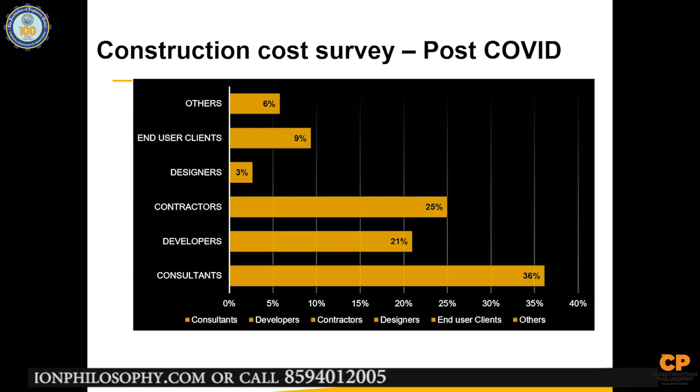This was done in the month of May, where we went out in the market to understand, because no one knew what is going to happen, whether prices are going up or down, whether labor is available or not. So when we did the survey, our focus was on what's happening with cost. The interesting read was about 53% of respondents were expecting steel price and cement price going up, compared to what we had in the market. That's a majority of people feeling prices will go up in the long to medium term. I'm not talking about short term. Short term, obviously, prices have gone through the roof, especially for cement and concrete RMC, because labor is less, there's no supply available at RMC plants, and you need to pay extra.

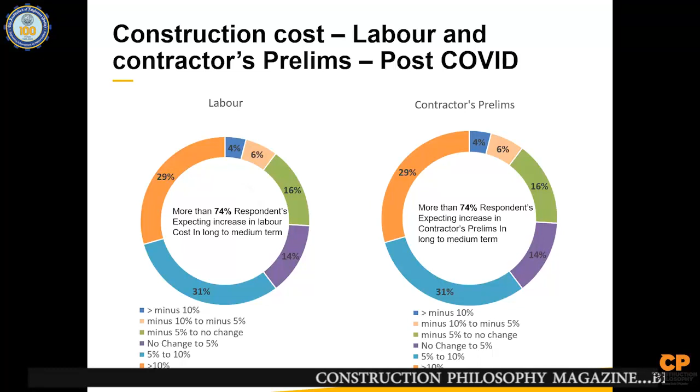But even after stabilization, they feel the pricing will have a little more effect. The major part where everyone was more concerned was labor and contractors' overhead or prelims costs. About 74% of people feel that labor cost and contractors' overhead is going to go up post-COVID, because you need to make sure labor camps are proper, better than what you used to provide. You need to ensure all medical histories are checked, you're doing all the sanitation measures, at least until everyone is COVID-free technically with vaccination. So until that time, all these preliminaries are going to go up. This will probably be maintained because you don't know when it's going to come up. So every contract now will ask for all this as a minimum compliance. And when you have it as a part of compliance, which was not there earlier, that means your price is going to go up.

So these are the places where we think prices will increase, and you will have an impact on the project price. Right, so I hope that was helpful.

Before we started, a little dry topic of procurement and procurement routes. Yeah, all right.

Procurement - why do we do procurement? We as a client or owner want our works to be done, and we want to make sure we provide the work in the right analytical manner to the contractors, and we have the best possible options. And when we make a decision, it cannot go wrong. It has to be proper. So there has to be a logical way of evaluating things. That is why you go with procurement.

So how do we get it done? The best way is to write the procurement strategy along with your project cost plan, at the stage of schematic. I wouldn't say at concept too much because you won't have complete information yet. You can start at concept, have the preliminary, but have a sign-off by the schematic stage. So you know exactly how things will pan out, what packages are required, and what time frame you need to refer back to. So that is something you need to look at when considering the procurement strategy.

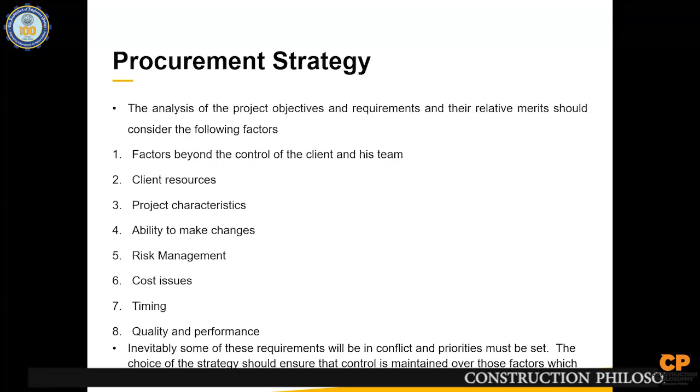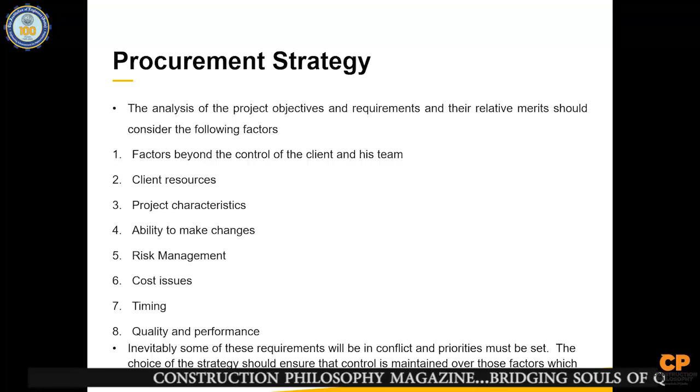So this procurement strategy you need to prepare. The procurement strategy should have all these factors: how is the client - national or local, does it have the ability to understand the type of project, does the client's team understand the complexity of the project they are entering into, what kind of project it is - a data center, a regular building, or a warehouse. Can we make changes in the program because there will be future requirement changes? How do we make sure that option is open? How do we manage our risk? How do we ensure the pricing we get is the best possible price? And how do we ensure we can manage the time? There are various aspects to this - you can have an early start contract, complete the design and then do the work, or you can wait for the client to ramp up his team. Depending on all these factors, you need to work on your procurement strategy, right?

The major part we typically see is time, cost, and quality - that's where it ends up. So based on this, and based on the risk attached to all these three factors, you have to decide, or assist your client to decide, the procurement route.

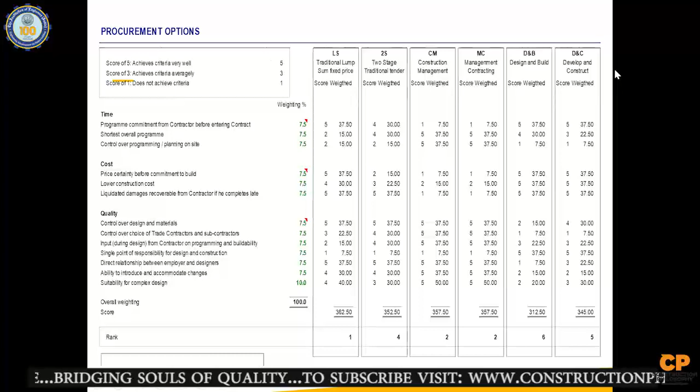One of the ways we look at this, and the way we do it, is a sort of rating system. I apologize that this is a little hard to read, I'll see if I can increase this.

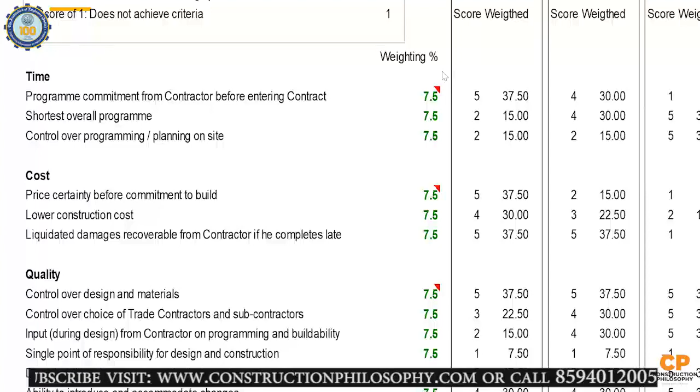What we've done here is broken it down and provided the weightage. Like a typical QS, I like to put weightages for my different factors - time, cost, and quality - and this gets discussed with the client. If the client has a higher requirement towards quality, I'll put a higher percentage towards that. If my client is more price sensitive, I'll weight the price more. Or if the project is more time sensitive, then I need to increase my weightage for time.

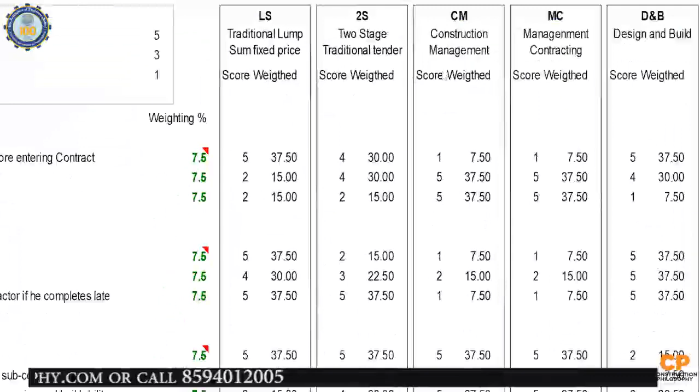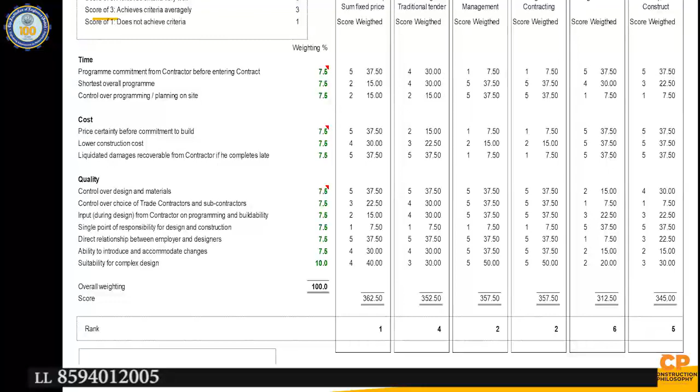Based on that, and based on each different type of procurement, which we'll touch on in the coming sessions, you can provide your own scoring, and based on that get to a judgmental call - a proper scientific way, but still a judgmental call - about what is the best possible option to go for. So this is something to look at when you consider procurement as an option.

So you derive a method which works for you and your company, and then come up with the solution that, okay, let's do it this way. So there are various procurement options available.

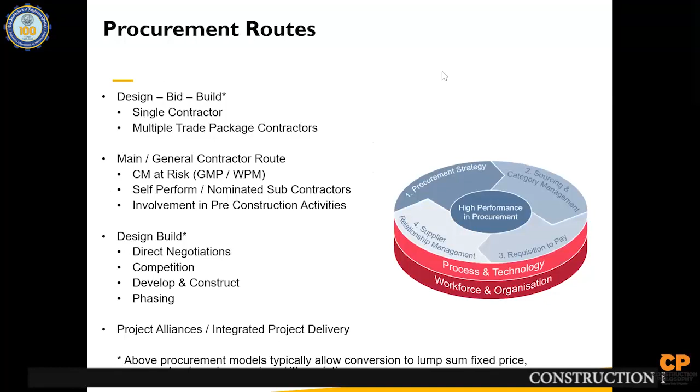The traditional and standard Indian way is design, bid, and build. You will have a full suite of consultants who do the design and provide the tender package and tender drawings, and the contractors will bid towards it and then build from that.

Then you have a main contractor, a general contractor, as another approach, where you have CM at risk - construction management at risk at a guaranteed maximum price or warranted maximum price - or you have self-perform or nominated contractors, or at times you want the contractor to participate in the pre-construction period as well.

You also have design and build options, where either the client provides a one-stage design and a design builder completes the design and constructs it, or someone just tells you, okay, I need a 300 bed hospital - please design it, this is my basic criteria, these are my basic specifications, you design it and provide it. So that's a sort of design and build, where everything is the responsibility of the contractor.

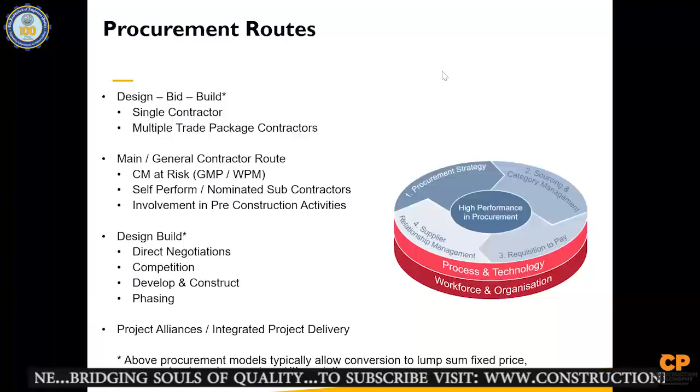You also have different other approaches like project alliances and integrated project delivery, which we discussed yesterday a bit. But again, these are the various routes available when you go out to market.

So it's not just labor, or material, or labor plus material - there are ways to look beyond that. You can divide it by how you want the price to return: item rate pricing for each item, or percentage based, where my estimate could be 15 crore or 20 crore and I'll take 3% or 4% on that. So based on the profit margins, you have a schedule of rates and work on a profit margin. Or you can have a labor contract based approach.

So per square feet, I'll give you $500 a square feet for labor contract, or $300, whatever. Or there's a lump sum contract, which is material plus labor plus plant and everything - a lump sum that will not go beyond that. Or it's based on square feet, where per square feet is my cost, and if the square feet changes, my price changes. You just need to make sure the methodology of measuring the square feet is agreed upon.

You also have sort of cost per key. So for cost per key or cost per bed, like say in hospitals or a hotel, or you can also agree a guaranteed maximum price.

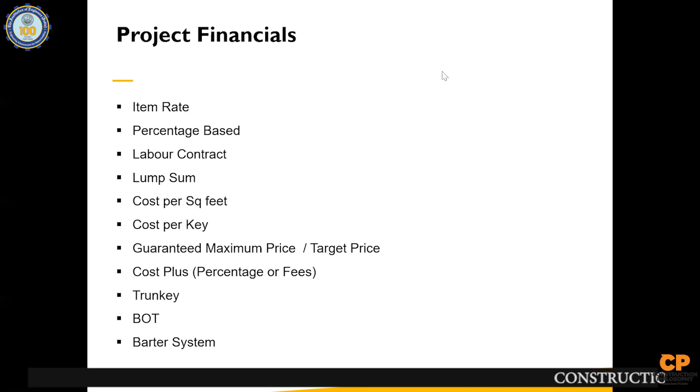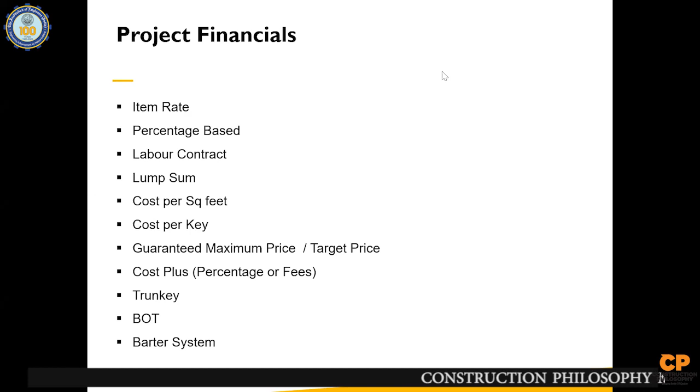A guaranteed maximum price or target price is based on, okay, this is the maximum I'm going to spend. I don't want to spend more than this. Beyond that, it will be your risk. So a contractor gives a guarantee that if your design doesn't change, your requirement doesn't change, they'll finish it within this price. If it does not happen, that's their risk.

There are contracts which are cost plus, so you can agree a fees plus cost, or you can agree a percentage margin. There's turnkey, there's build operate and transfer, or there's a barter as well. In Bombay and some places, the contractor will say, you give me 10 flats and I'll construct the building for you, and then they will sell it in the market as and when the time comes. So there are various ways of financial jugglery or typology you can play on.

So going a bit in detail on the advantages and disadvantages of design and build. You have the design build vendor who will control everyone, all other packages, all the trades. Some of them may do it in-house depending on their capability and understanding. So if it's a civil contractor, they might do civil on their own.

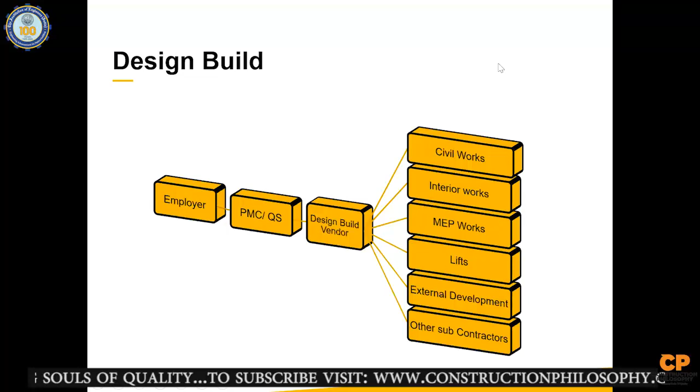If it is a data center project and MEP is their own, they will do MEP in-house. The rest everything they'll outsource. So depending on the type of project and the inherent capacity or capability of the contractor, they will decide that. The advantage is the whole design and construction is done by a single party.

So it's an advantage that you are not worried about the coordination, it is their job, they have to take care of that. Buildability-wise, the design and construction teams will talk to each other properly, so buildability and constructability are much easier to attain.

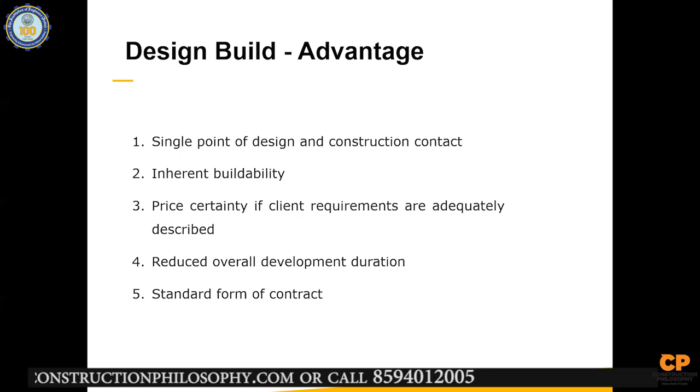The price certainty is pure because you can always describe this is the maximum I want to get paid, I want to pay, so it should not go beyond that, and design build can give you that confirmation. However, the only catch is your requirement should be clearly identified. If you don't, design build is the worst option you can have.

Design build has a standard form of contracts, like say the American Institute of Architects and all have standard forms which you can adopt, and you can reduce your time for the project. I don't need to wait for the whole design to get over, I can start my construction earlier because my design team will churn out the requirements faster to what I need.

The disadvantage is the client has to commit to the contract before design is completely done. That's one worry - what if the client does not like the end design, then what? The client will not have excessive design reviews or specification reviews because it becomes a little difficult since you're giving your requirement to the contractor, and that's very high level information.

It is not detailed out, like type of the makes, the smaller details, the sections - that is not agreed on. So that is all left to the design builders, and the design builder will obviously try to make the max out of that. So unless you are very clear in your initial design brief, it's very difficult.

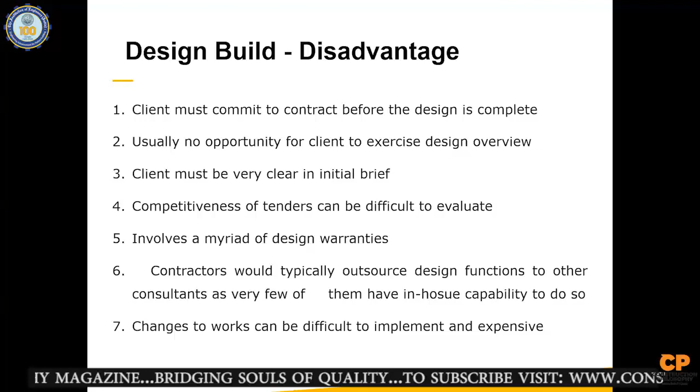There are different kinds of design build firms. There are contractors who will do the design and take design and build with small resources and outsource the remaining part, or there are other contractors who do it as well. Sometimes the design guys will do it and then outsource some part to a contractor.

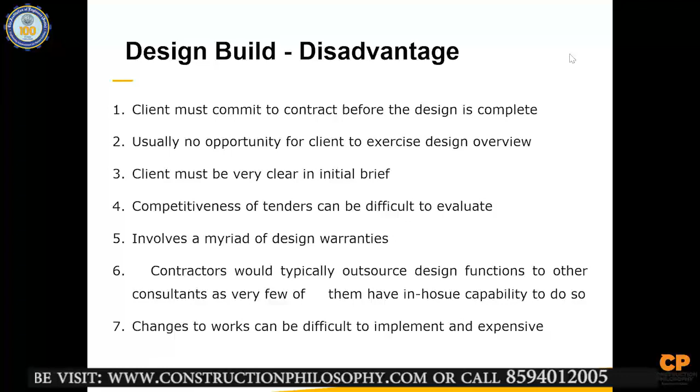In India, it's a little difficult and it is not fully evolved, but it is coming. Design and build is coming for sure for the larger projects and even the fit out projects. But we need to be aware that your design brief has to be 100% clear on what the client wants. If the client is not sure about this, pure design build is not the option to go for, because of how India thinks. If you go to the Western world, it's still easier because they have pretty much standard practices.

Okay, I need a school for 300 kids. It should be as per the standards given by Department of Education, and that's fine. But over here, things keep on changing.

One of the variations we adopted to take care of that is we have done the initial concept level designs, sort of layouts or agreement, so that the client is more or less okay on what the layout is, whether this layout works or not, and what their basic specifications are. So if you have early stage information, based on that, if I go with the remaining design and build, partial design build, it's still better rather than go with the completely designed build, because here my client is already aware about what kind of options I have.

They may have to give some money as a fee to the contractor or a new designer to give them the options, but that actually works out better because they have different options to look at and they can finalize. They don't need to wait for the whole procurement process to get over, and they can have it at the front end, right? So if you have a design build variation as a front end design with a schematic, that's actually better in India. That is what we have used.

This reduces the risk on the project. However, it takes a little bit more time.

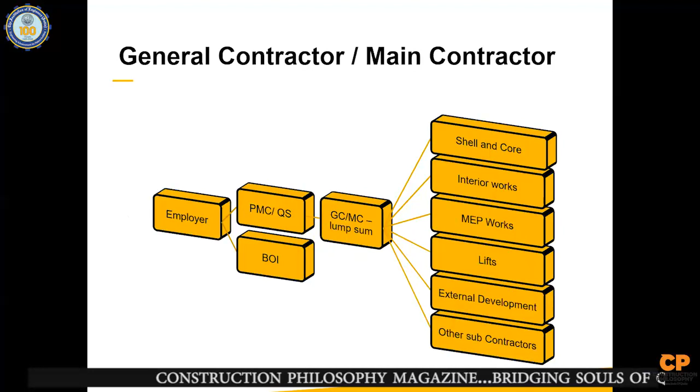So another way to look at it is we have a general contractor. In general contractor, what happens is you have consultants like PMC or QS, whether in-house or outsourced. Along with them, the client procures the main contractor. The main contractor probably would work, they might do some packages in-house like shell and core or interiors and all, but they will let out all other packages.

And whether they will agree as a lump sum depends on your design. If your designs are fully evolved, then you will have a lump sum price. But if your designs are not fully evolved, then you can keep it as a package price, and then you can discover the price along with them.

GC gives you competitive advantage at the front end. However, there are ways where you need to evaluate the GC, what packages they're doing in-house, what they are not doing in-house, and those kind of things.

You will not get your early stage design information. However, because your design team is completely detailing it out, you have more comfort level on the quality of that design which is coming through. The changes are easy to manage because with the GC and the packages, you know what tender set is and what the new drawings are, and based on that, you can easily evaluate the change and provide.

The risk of uncertainty is taken by the contractor, and the contractor takes care of most of the things after the GC has taken that price. And obviously, the contractor is liable for price or quantity variation if there is a change in the design from the client or the owner.

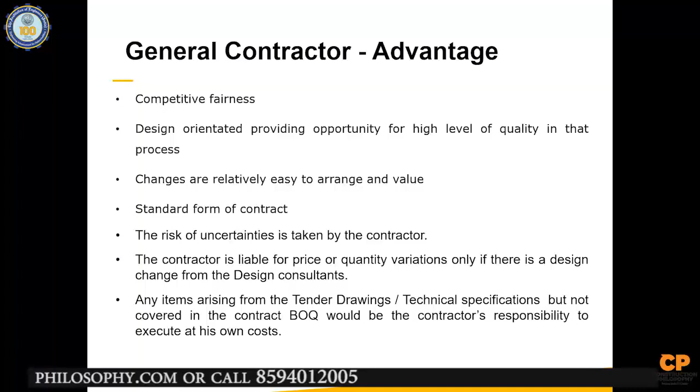So that is something to be looked at, but only when there is a change. One way what we do is when we go the GC route, we ask the contractor to review the BOQ, ask them to take care of that BOQ to ensure that they take complete responsibility towards it. So they take all the measurements, they review the measurements and confirm the quantities and the items so that there is no variation later on and they cannot claim for that.

Only unless you change your design. If the design is changed, then obviously the client will pay for that. So this helps in reduction of risk, as a mitigation measure.

Disadvantage in India, it's not very common, so there are fewer vendors who can go for this. The unknown site conditions, which is a worry for most places, means the contractor prices will be higher, and you will end up paying higher compared to a traditional method. So that's a disadvantage in terms of the price being higher.

If the main contractor defaults, that becomes a problem, because if you cannot go with the main contractor, that means you need to replace them. When you replace, that becomes a problem because you need to go with a new vendor and you need to do everything again. You have a performance contract, but they may not be sufficient enough, so that becomes a problem too.

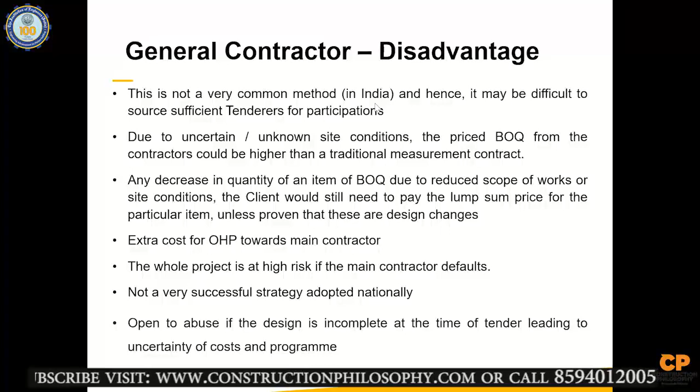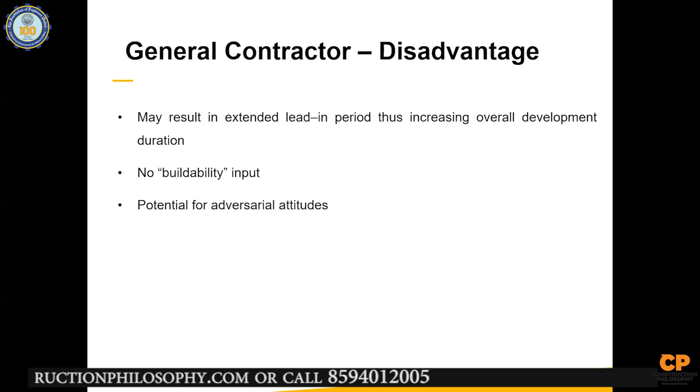With a general contractor, because your design is completely done, there's no buildability input, and GC always has a potential for adversarial attitude - people not working together as a team. They are still in a master and servant relationship, which is again not the ideal scenario in my opinion.

So with a general contractor you can try to offset some of the price or risk. You can provide basic rates to the contractors. If you're able to go with a lump sum, then you can have a schedule of values. So your BOQ goes out, and everything goes back to your overall bill of quantities - but you are basically talking about drawings and specifications. If you are going with the item rate contract, then you will need to have item rates. Otherwise, you can go with approximate quantification and ask the contractor to update the quantities or provide queries, and in case of any difference, that can be sorted out.

You will also need to decide if you are supplying anything directly and up to what level - what are the battery limits for that? So if you are supplying a chiller, are you also supplying the panel for the chiller? Are you taking care of its first maintenance, testing, commissioning? Are you taking care of temporary power for that, or is the contractor going to provide it? So you need to decide and agree on your battery limits, how much they are. That is something to be looked at.

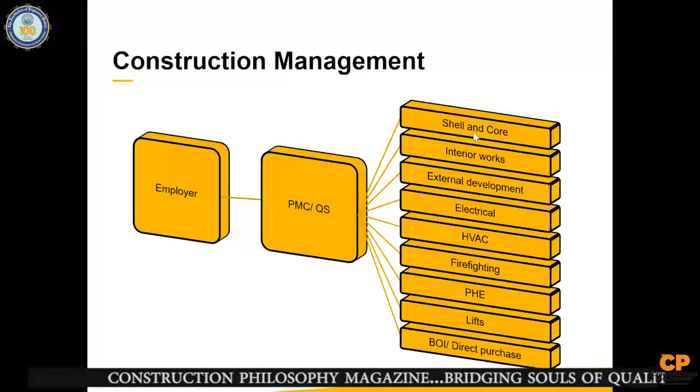One of the other aspects, and what people have typically done in India, is construction management. In construction management, all the packages are broken down into whatever we need, and depending on all specialists, then we go and buy. This is the standard method for most of the private projects, I would say. Within that, you have all the packages, and you have one or two agencies who will coordinate everything.

Construction management advantages: you can go with early packages - as long as your excavation package is ready and available, you can start that package. You can go a little faster. Everyone is clear about their roles and risk because it's all one-to-one contracts - there's no overlaps. Your changes can happen during a later stage as well.

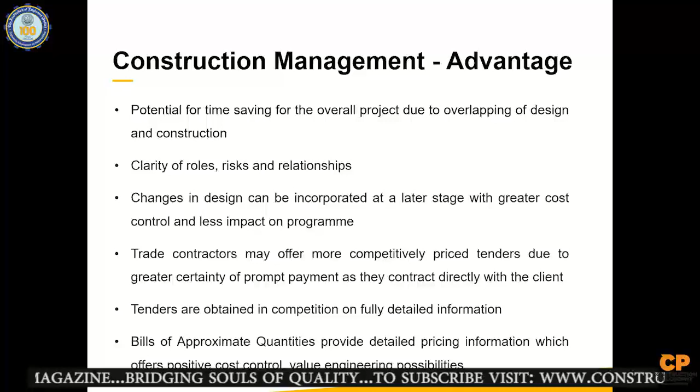Obviously there'll be value engineering and value management issues, but you can make changes if you want to. The trade package will have a more competitive price compared to the main contractor, because the main contractor will need to put pricing, risk, and overheads on top of that. You can have your tendering process in competition with fully detailed packages because you will have enough time for that, and you can go with better post-contract evaluations because your designs are completely detailed and your requirements are done. Only when you keep on changing your design will problems come.

For payments, either you can have a percentage based approach or based on remeasurements, since you have the bill of quantities available and there are multiple packages. The programs are clear - there's a clear understanding about the project program as long as the contractors are submitting it properly, and there's no risk. There are multiple players available, so if one person does not perform, you have other options within the site which you can put through - you have more availability, and your risk is reduced.

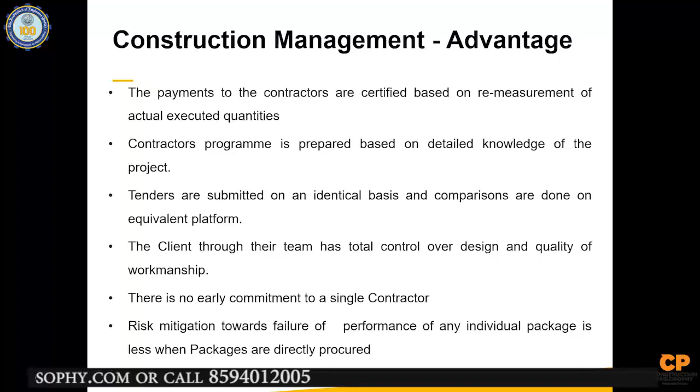In India, it's about pricing most of the time, so this is one of the most cost-effective ways to do this. With the advantage of supplying some of the items or having the basic rate, this goes well. So these are the major ones for construction management.

In terms of disadvantages, there's no single responsibility - there are multiple vendors and multiple players. There's always a fight on the site, like this guy has not given me the space.

My coordination is in trouble, my site logistics is in trouble because of this and that - there's always a need to be evaluated and discussed. So that is one of the issues. The client needs to take a completely owner-driven call because they need to be completely involved.

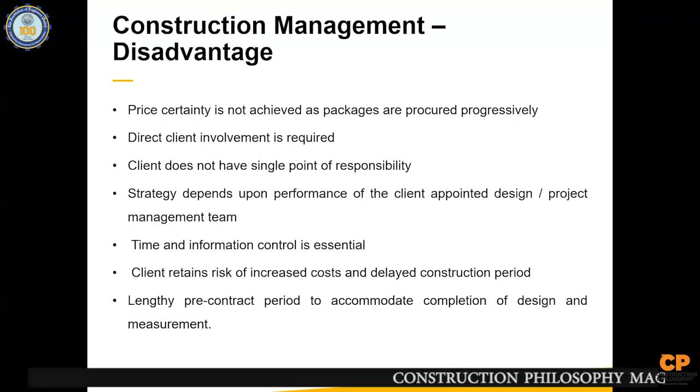My price certainty for the end project will not come. It will come only towards the end when I'm closing the final accounts, because there are so many packages, and every time either there's a change in design or a change in approach, my price would change. So based on that, there's de-scoping and all, and I need to know what is my real pricing - I could have overall control, but it's not completely nailed down.

Then it will require a little more pre-contract time. So there will still be parallel working, but there will still be additional time required. It will be parallel work, where the design keeps going along with your construction period, which is not ideal. Ideally, we should prefer that the construction period and design period are both adequate.

When you're shortcutting the design period, you're not evaluating all the risk, and you're not giving enough time for value management and optimizing - you're just going for detailed design. So detailed design will come out with changes. So it's better to go with a longer pre-con period compared to a standard Indian one, which is very short.

So these are some of the points - advantages, disadvantages for construction management. There are other ways you can look at as options, which is the nominated contractor.

So if you like some contractor who's a civil contractor and he's doing only civil, and you want him to take complete responsibility for coordination and all, what you can do is work with a nominated contractor as a thought process. You nominate him and he works out his pricing based on either fee or percentage, and you devise and agree an overall responsibility matrix - what he's going to do and not.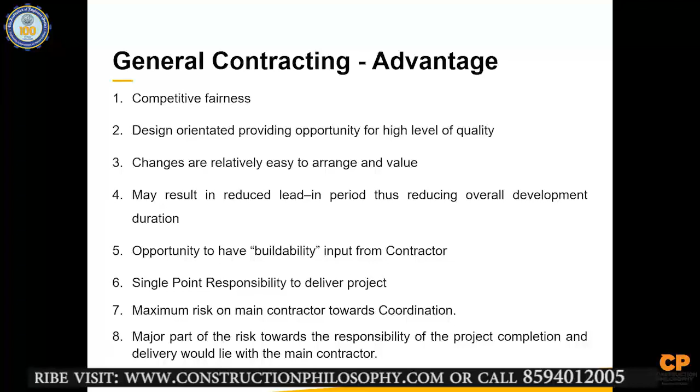The only issue I typically see in this kind of arrangement is making sure how the vendors who are getting procured actually get procured. Are they procured along with the contractor or not? If you're getting them procured along with him, that's better, because he can bring in contractors whom he's comfortable with.

So responsibility is actually passed back. If you're doing procurement on your own, and just giving it to him, then his responsibility is only towards coordination - performance and quality are not part of his scope. So that's something you need to work out, whether you want that or want it separately.

There are variations within the process where you can play and work on what responsibility you want to give the nominated contractor or subcontractor. The advantage is you still have single point responsibility, you still have the GC giving you more buildability inputs, and you have more control.

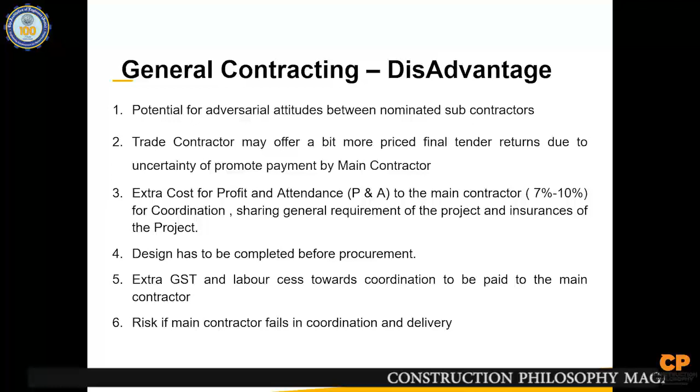However, your pricing will have an extra cost - you need to pay extra for profit and overhead to the main contractor, and design has to be completed. You'll have to pay more to the trade package, because the main contractor may not pay them on time. So that's something you need to work out - that the GC has to pay subcontractors on time, whether nominated or not.

So that's another issue we see in India - prices go up because payment cycles are bad.

This is another method we're currently using in some of our projects, called guaranteed maximum price. So I have a GC contract - I agree his overheads, I agree his percentage margins, and I agree his overall program. Then he goes out into the market and procures everything. So he'll procure all the packages for me one by one, and it will be jointly procured.

And based on that, I will agree his percentage margin. However, he has given me an overall pricing already, that, for example, if it's a Resi project, I'm going to do the project at price 2600. If it goes beyond 2600, then it's part of my risk.

So that's one way to control your price and take contractor's advantage as a GMP, and you still have a completely open marketplace. So each package you go out for tender, 3 packages, 4 packages, the GC will arrange that. You can add up your names as jointly agreed, and then you can go out to market, get the price and get it done. Right? So this is one of the nicer ways of doing it, which has come up.

This is what the US used to do. The US has it as a guaranteed maximum price, but they don't have the joint procurement. They just submit the pricing. But in India, people are more cost sensitive, so they want to be involved more and more.

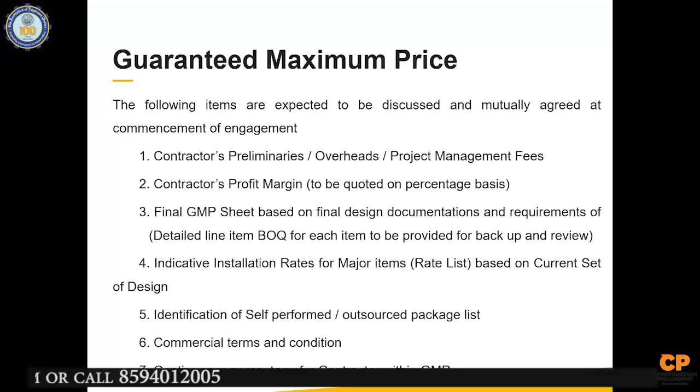Terms, conditions, payment cycle is something to be agreed with them. And because it's a bit more risky, I typically, and my clients are typically, allowed within the contingency about 3% or 5% of the value, which works as a buffer. So in case they missed out something or the project price has gone up in one of the packages, they can take it from the contingency, right?

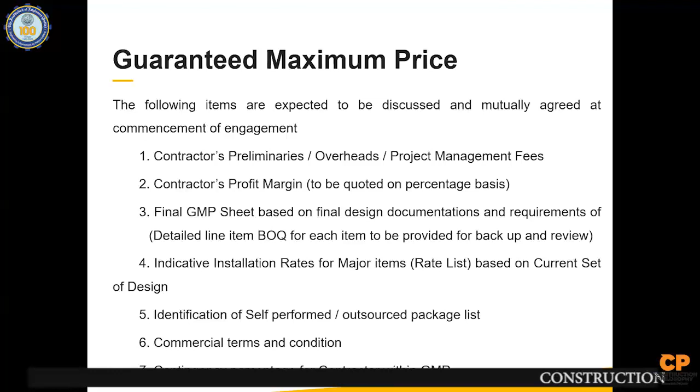And that contingency is actually better because we still have visibility towards it. We'll definitely have the visibility towards it, but that will make sure the contractor says, okay fine, I have this extra advantage of 3%, but I'll make sure the project is done within this 2600. Yeah, so this is something as a guaranteed maximum price can be worked out.

You have a single point contractor's contract. You have price certainty. You know what is your overall maximum price. Until you change something, nothing else will go up. So all this is part of the GMP what you can use.

The disadvantages, again, your design has to be correct, and you need to have your detailed design available. It's difficult to break down the competitive pricing, right? So there are formats to be done in a way, it could be customized to the requirement, but it can be done.

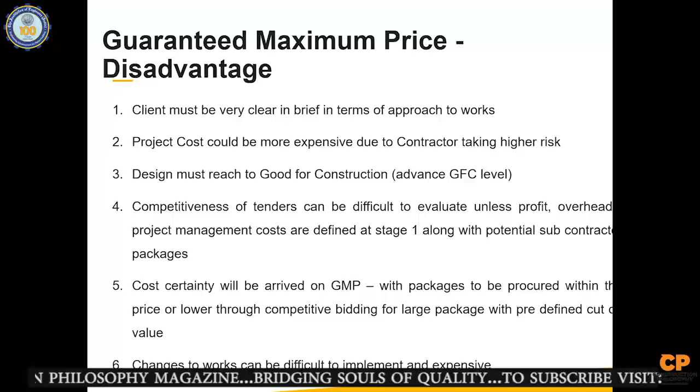And the certainty will arrive only when you have the buyouts. When you buy out all the packages, then only you will realize what is the real value, how much savings or increase it could be. Increase, you have kept it to 3% or 5%, but whether even that is possible or can we save somewhere, that can be done only when all the procurement packages are done, right? So these are the advantages and disadvantages of GMP.

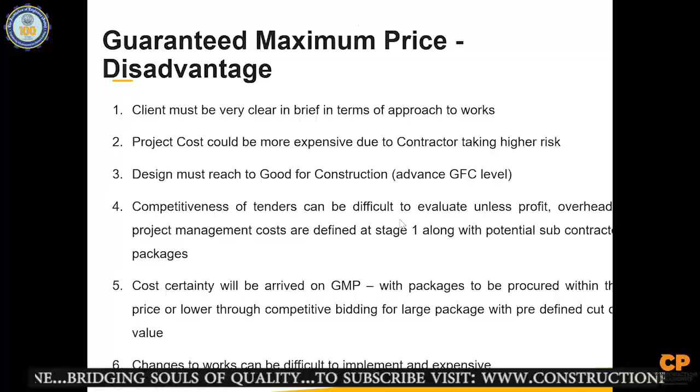There are a couple of other procurement routes, one is alliance contract. There are a couple of projects, I think even Kochi, where you had alliance contract. So in alliance contract, the whole project team, including the consultant, including the contractor, would work as a single team, that this is my maximum price, and if they save money from that, then they would share that reward. But if it goes beyond, there'll be a negative as well, right?

So this is a method which Tata Realty had used on Trillium, the residential tower in Kochi. So they had used it over there with Leighton as the contractor. So that is the alliance model what you can use, which is a multi-party contract. Everyone basically works as a single entity, single project, right?

And there's integrated project delivery as a partnering. So again, there are ways. As I said, the Alliance board takes care of it and all, it's directly on an open book format. So whatever goes on open book, plus all the add-ons on top of that as a percentage or fees, whatever is agreed. So that is alliance contract, which you can use.

Partnering is a little different way, where you talk about a management approach, which emphasizes a collaborative relationship rather than a short-term issue.

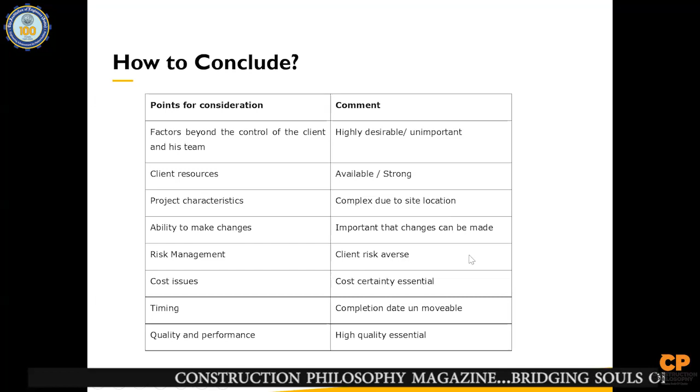You need to write down what the issues are, and what the major driving points are - whether factors are beyond control of client, or the client resources are good and strong, what kind of project it is, ability to make change, risk management, cost issues, timing, or quality. Based on all that you derive your own method. So what I shared earlier about the metrics on how you select the procurement route, you can conclude based on that.

So you go through all the options, understand what is required, and then you do it.

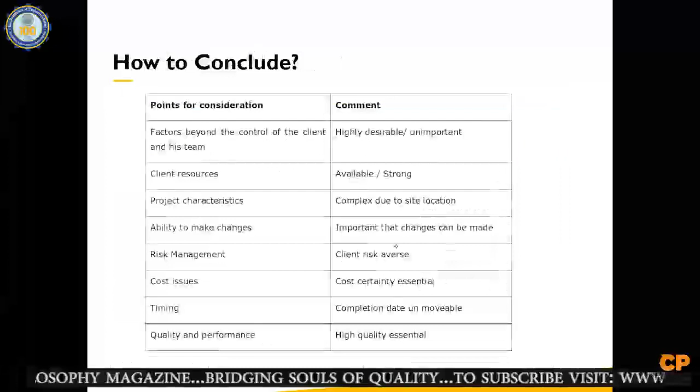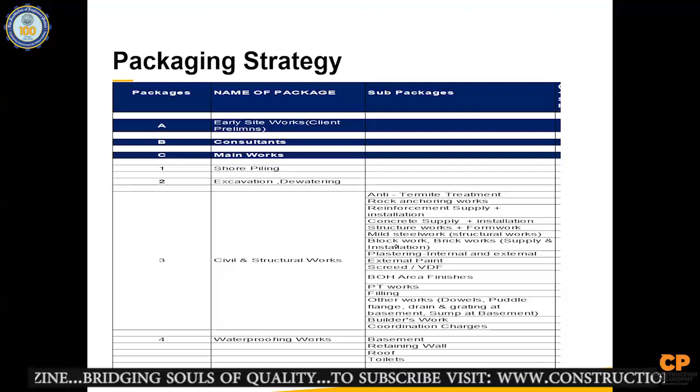Once you decide how you move and what kind of project procurement route you're taking, the next strategy you need to decide is how you're doing the packaging - what packaging and what item goes where. Let me give you a little - sorry about the image, but this is the best I could do here.

So for example, who's going to do what - whether shore piling is a separate package, excavation is a separate package or part of one and two together, civil works, what all would be required within that, whether waterproofing is a separate package or part of the main contract.

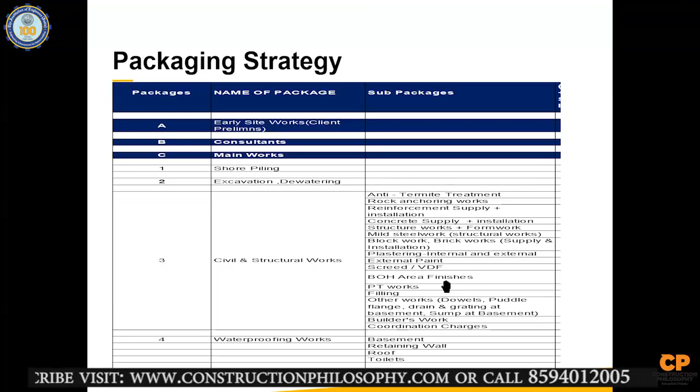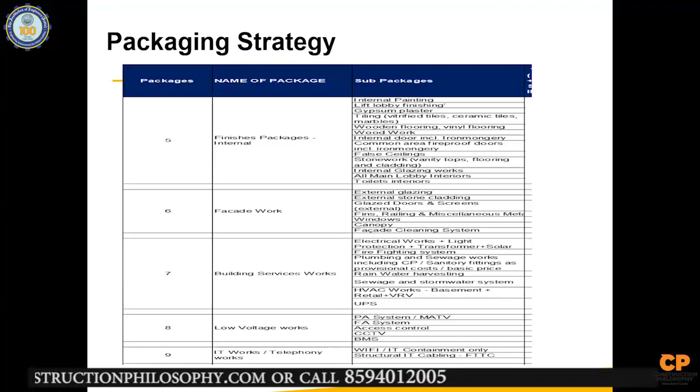So in this case, we had all these packages as part of a main package contractor, which was supposed to be done. Then you break down all finishing, all facade, whether it will be done as part of the main package or separate. So you write down all these packages, what is required for the project, along with your schematic cost plan, so you know exactly how the project is to be priced.

At times, what I've seen is even experienced QSs price it as per a standard trade package, but they don't realize this is a GC model, or the client is expecting a different way of procurement. They come in less than what the contractor will quote, and then there's a huge gap, right?

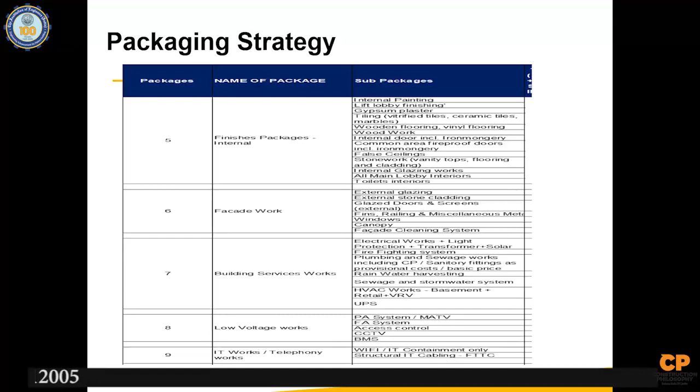And that becomes a problem. So that is something to look at when you are doing this packaging strategy. You decide your packaging strategy, how you're going to do it, how the coordination needs to be worked out, and then you decide all these packages as well.

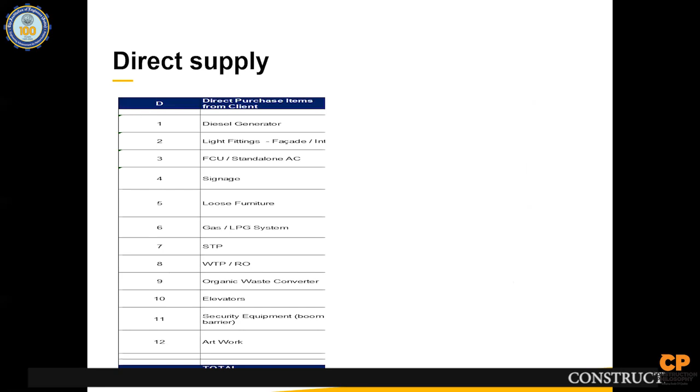As part of that, you also decide what are your direct supplies - what you're going to be providing directly to the client. So a DG, or chiller plants, or STP, or whatever - whether you're tying it separately or tying it within one of these packages.

So once you have this clarity, your procurement schedule becomes much faster. You know exactly what you're buying and how you're buying, right?

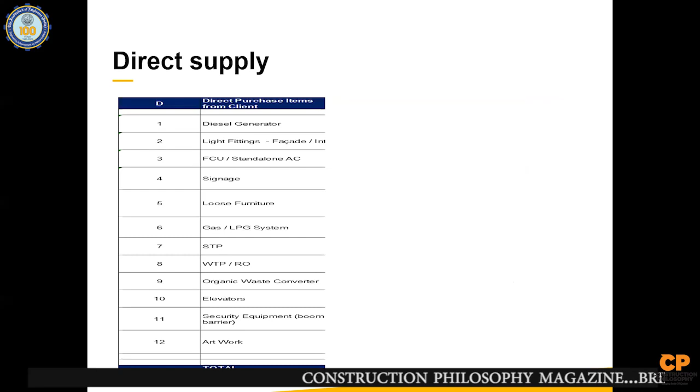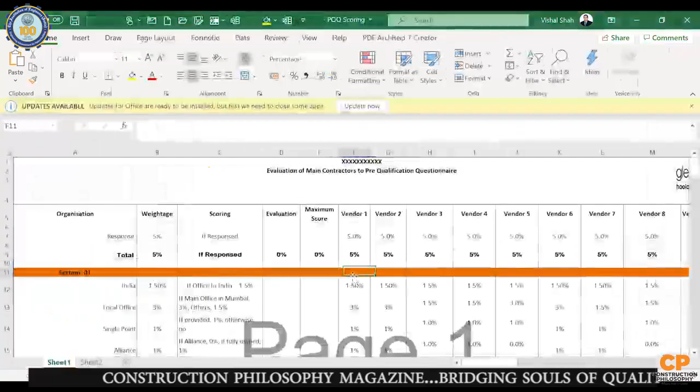Coming to - once you decide on your packages, the next thing is how do you go with the contractor, how do you get the contractors on board? So let me just share with you another file. So what we do is - I'm sure all the companies would have done this - for all the packages, how do they sort of do the pre-qualification.

So we also do our own way, and depending on the project, we customize. Depending on where the company is located, how long it has been in function, whether it has a number of employees we require for the project or not - based on that we derive the percentages.

Then we also put what is the financial status, what is order book values, what is the turnover percentage, whether they are making money, for example. If they're not making money, it's going to be a bad sign.

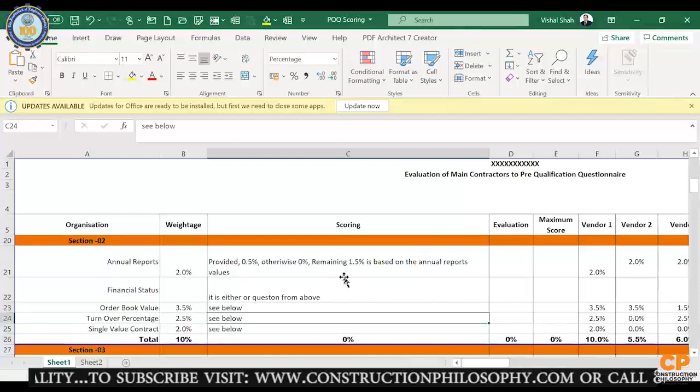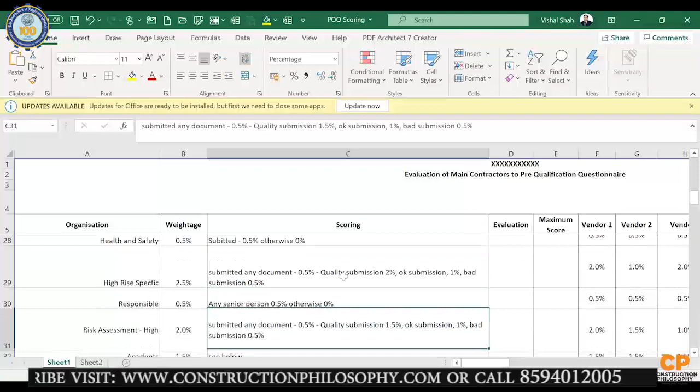So looking at all that aspect, we also look at the specific experience they have - have they done a high rise project or not, have they submitted the subcontractor, how they're going to do that, and how they're submitting the quality policy, safety policy, do they have all the standards available, do they know what to do, right?

And then we go specifically into the type of projects they've done, whether globally or locally, what they've done in the past. So based on my project of that particular type, we obviously break it down - per project we give, per year we give.

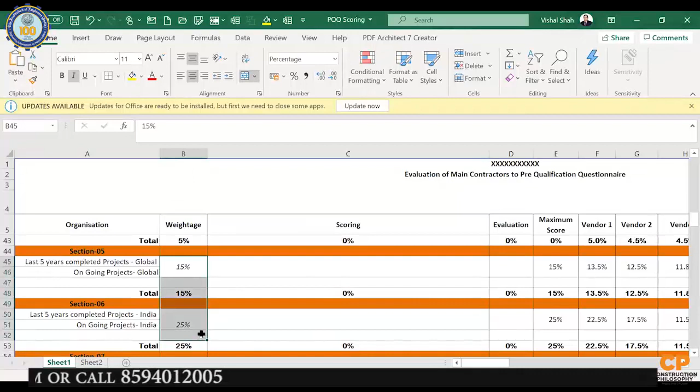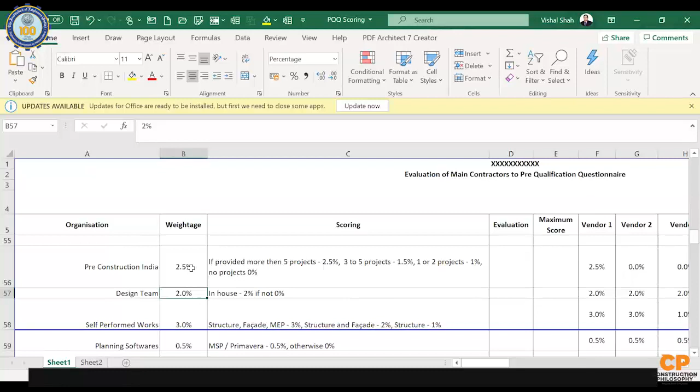So they should have done 4 projects or 3 projects, whatever, and the type and typology of that project. Then we break down based on that and the type of services - do they have the pre-con team available? In this case, for example, we needed someone who can guide us in the pre-con because it was a high-rise 300-meter tower where we needed help from a constructability point of view. Do they have in-house teams for design or software, or have they gone into arbitration litigation? Do they have a good client reference or not? So all this is what we do to evaluate the contractors.

So there will be vendor 1 to vendor 9, and you can select the ones you want and take. I'll swap back to my PPT. Just give me one second.

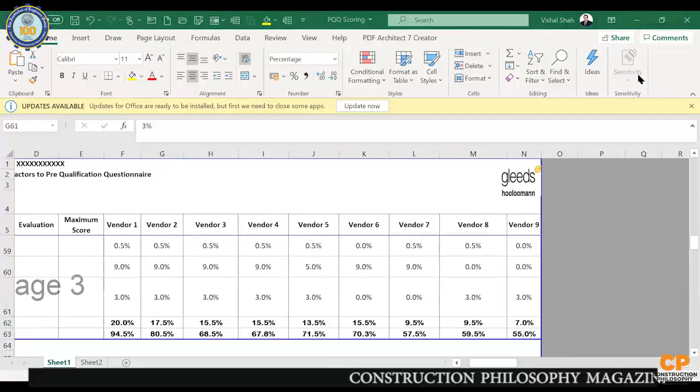Okay, right. So once you decide your pre-qualifications, then you need to work out your tender event schedule - when you're going to float it out in the market, when you're going to get it back, and when you're doing round one, round two, round three negotiation and finalization. So this will help the project programmer understand how much time you're going to take.

So that is something to be worked out as a TES. Type of form of contract varies in India. You have CPWD, Indian Institute of Architect, FIDIC, American Institute of Architect, or a customized version of that, World Bank kind of thing, or a bespoke contract. In India, people love doing bespoke contracts; they don't want to use FIDIC, they want to change everything in it, and they'll have their own different versions - every project will have its own different version.

So there are various forms which are adapted if you're working in the private sector. The tender document - I'm just going with a very basic thing - has all these documents which are the basic and important ones: the GC, general conditions, special conditions, commercial conditions, annexures, the technical specs, tender drawings, bill of quantity or schedule of quantities if required, safety, quality requirements, and the templates. So all these are part of my tender package when it gets together and I send it out to the contractors.

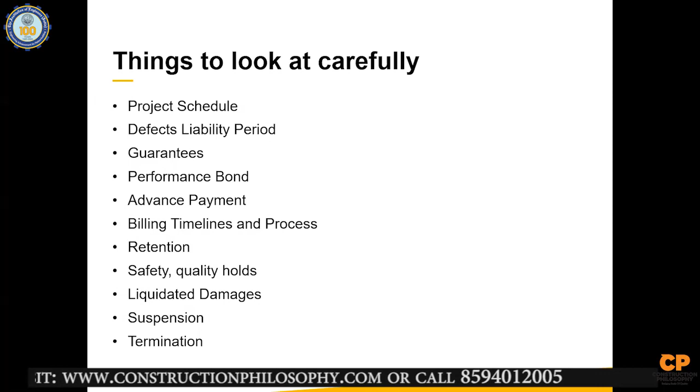All right, so what do we need to look at when we prepare the tender document? We need to look at the project schedule. Is the project schedule proper and adequate? Does it talk about the milestones? Can it be done in this price? Because what's going to happen is, if you provide a 6 months program and your site is not ready, that means your project schedule will go out, and then the contractor will ask for extra money and you will be in a bind.

So your project schedule needs to be 100% correct. Then you need to look at the defects liability period - are we talking about 12 months, 24 months, or much larger? And what kind of guarantees are we looking at? Then performance bonds - are we taking a performance bond or not? Are we taking EMD, which is earnest money deposit, for taking part in the contracting process? What sort of advance payment are we looking at? What are the billing cycles, and is the cycle time proper - 45 days, 60 days, 30 days, whatever - is it proper or not?

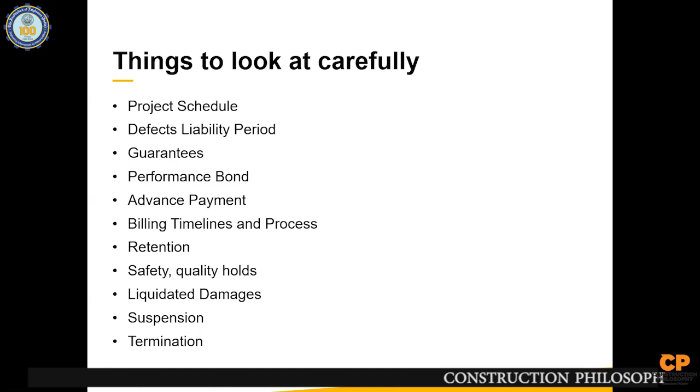What retention are we keeping? Are we keeping it against a BG? Are we keeping it against cash? What are the safety and quality holds? The milestones as such, and how are we taking off suspension and the termination criteria? So this is something you would look at properly when you look at the tender document, not the contract.

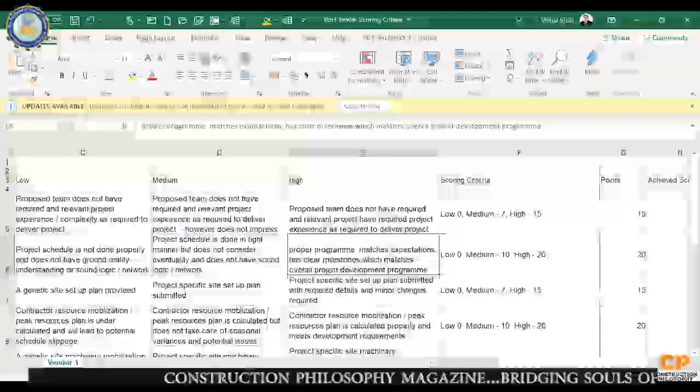So once you have all the tenders, what you need to do is the comparative statements. When you do the comparative statements, you will obviously have the commercial criteria. However, doing it only on the commercial criteria is not the right way. You need to divide it into a techno-commercial criteria - that's the better way to do it, rather than just giving an L1, L2, L3. Agreed that you have pre-qualified the contractor and contractors are good enough to participate.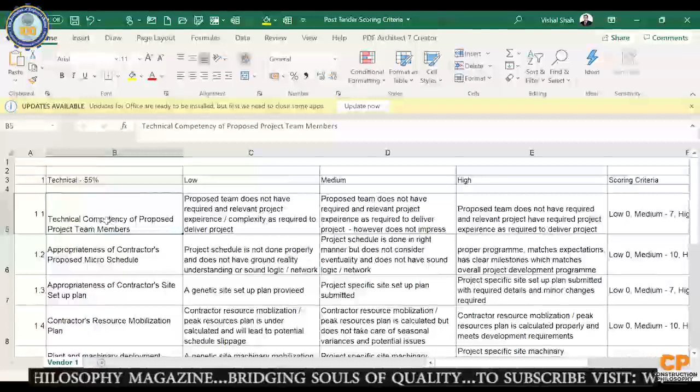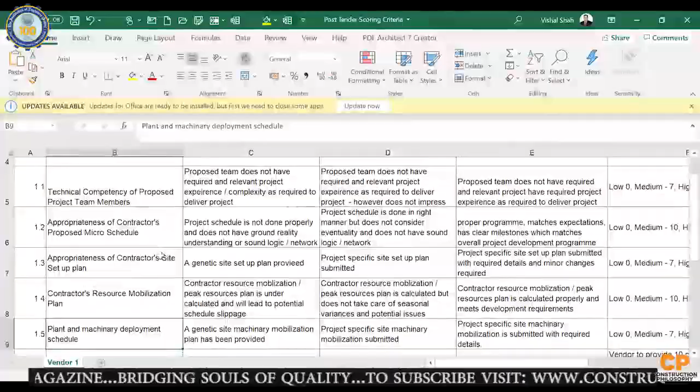But depending on this particular project, in this particular way, does he have the right person? Is he providing the right person? Does he understand the project schedule? Does he understand the site setup? Is he providing the required resource mobilization plan as per the requirement? Is he considering the right plants and machineries? And are we looking at all the client referencing properly or not?

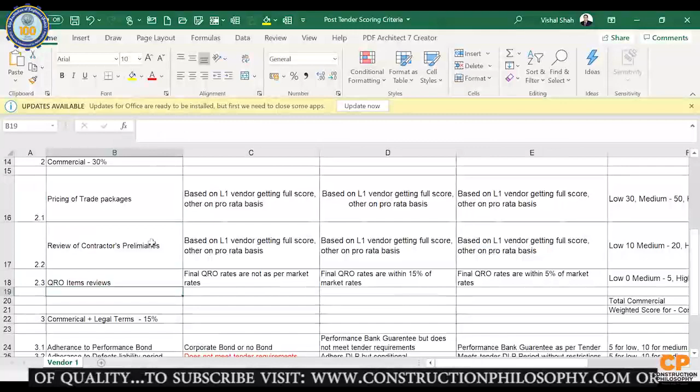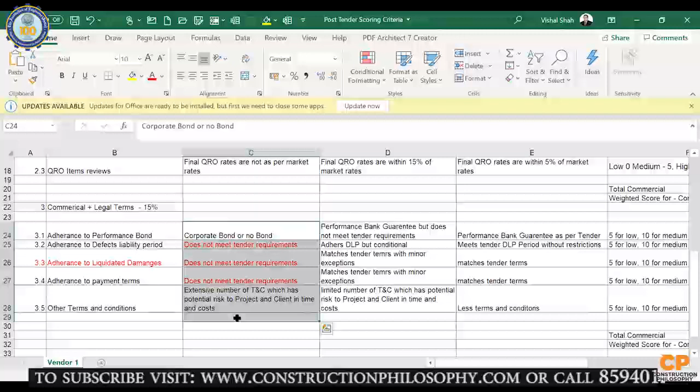Then we look at the commercial side of it. How is he pricing preliminaries? How is he pricing QROs? How is he pricing the trade packages? And what kind of terms, what he's agreeing or not agreeing to. Ideally in a government contract, if you don't adhere to any of them, it's all gone. But in private, what happens is we all negotiate again. So whether he's agreeing or not agreeing or moving, based on that, I can have my own standing. So my techno-commercial criteria will give me a different working compared to what we have, right?

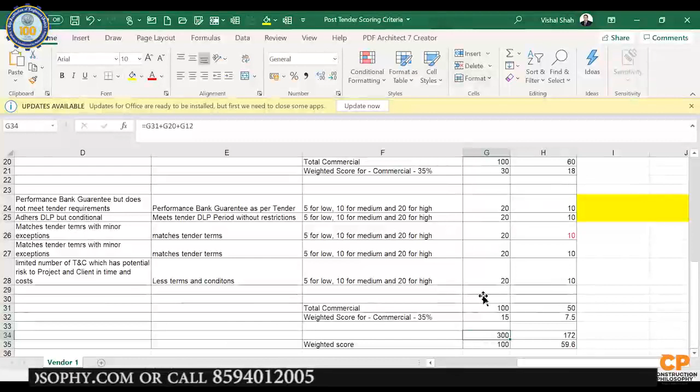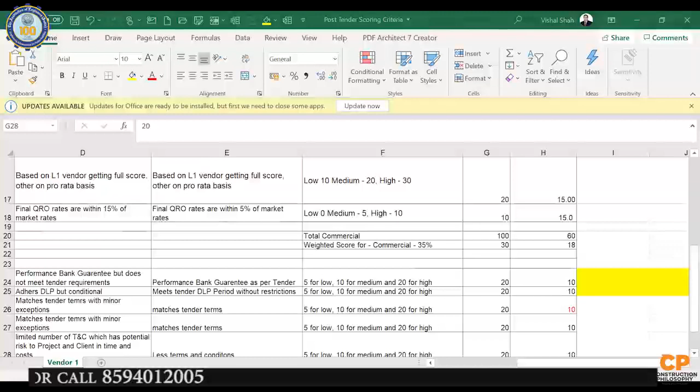My suggestion is never to go with only the L1, L2 process. L1 could be technically high, no doubt about it, possible. But you need to work it out in a scientific way to analyze the performance and then put down the cost. So you could give higher weightage to commercial and lower to technical, or go the other way around. Depending on what you think is better, you can go for that. This is one of the ways we analyze now. We just don't go with L1, L2s, especially in private, because that is now gone.

So some of the things you need to consider when looking at negotiations: you need to look at QRO, quote rate only items, because most of the time these items are the ones which don't get negotiated. The contractor puts any price he's happy with, and this item goes out.

You need to look out for the abnormal items. You can do average, minimum and maximum price, and identify the items which are abnormal. You can look at the 80-20 ratio, Pareto's law, where for major items you need to go in more detail to understand how the pricing has been done.

You need to ensure that the approved makes are proper, and everyone is quoting based on approved makes. Unfortunately, in India, what happens is we have approved makes of 3-4 different suppliers, but the prices of each of them is separate, so we don't really know what contractor quoted on what make. So typically we try to agree with them on which is the base make, and if it changes, what is the second option. But the first make is what he has to go with, and he has to prove that this material is not available in the market when they procure.

This is something that pinches the client quite a bit, because, for example, if he's agreed on Dorma as the fitting for a door, but the consultant has given, apart from Dorma, Hafele as well, or SS, there is a price difference or deviation between both. So how do you take care of that? That is why this kind of approach is required.

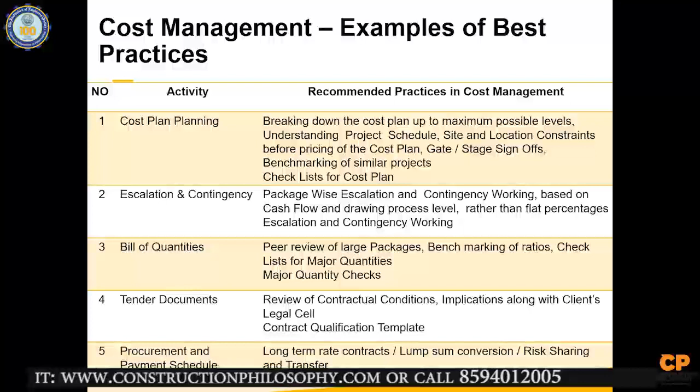Your tender document - make sure you have complete understanding of the contractual conditions. QSs are not legal guys, and there are implications when we put things in the tender, so you need to ensure the legal team is completely aware of what we are doing. And make sure you have long-term contracts, annual rate contracts, or lump sum conversions to reduce your risk.

Some of the other post-contract processes, which I'll just touch on - obviously Sini is going to take care of that. But as part of post-contract, you need to provide a handbook to the contractors, so contractors know what way they have to submit the documents, how they're going to submit it, and what documentation they need to submit with each and every bill.

So there is no way the contractor will come back and say, 'okay, you did not give it to us earlier, and now we have to get all this document.' It's going to take time, and my payment cycle goes on.

You need to understand, whether you're working as a consultant or a client QS, that the project will not move if you don't pay the contractor on time. You need to make sure the contractor gets his cash flow adequately and as required, and whatever you can do to help him out doing that is your job.

So if you provide a post-contract handbook, he knows from day one what is required. Then you need to ensure that if there is a variation, you agree the price before it goes for construction. After construction, it should not come for the commercial sign-off.

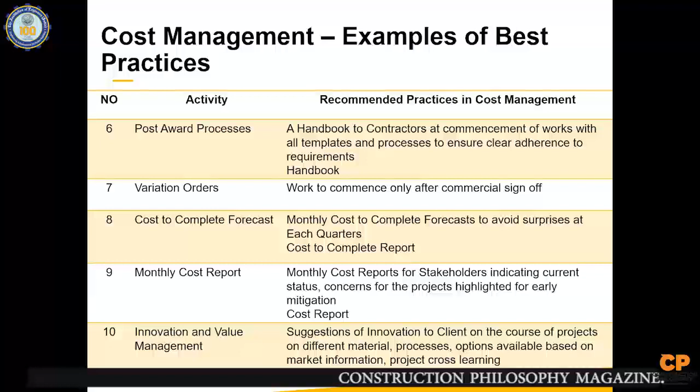You need to have your monthly cost-to-complete forecast done properly so that there are no forecast issues later and no surprises. You need to ensure monthly cost reports have been submitted to your stakeholders with any concerns you have for the client.

And because you will be working on multiple packages and the client will not have so many, make sure you provide your knowledge transfer from project to project.

The lessons learned: identify your scope, clarify your scope, understand your site conditions, understand your planning, and plan for your contingency and changes. Make sure your project is accurate. You do your value engineering and options properly.

You make sure that you have proper approvals for equivalent makes and products. You have all your basic rates sorted out and the process of approvals is proper. Procurement strategy is clear and you know your market trends.

If you do all this properly, there's no way you can mess up a project. Your cost management will be done properly.

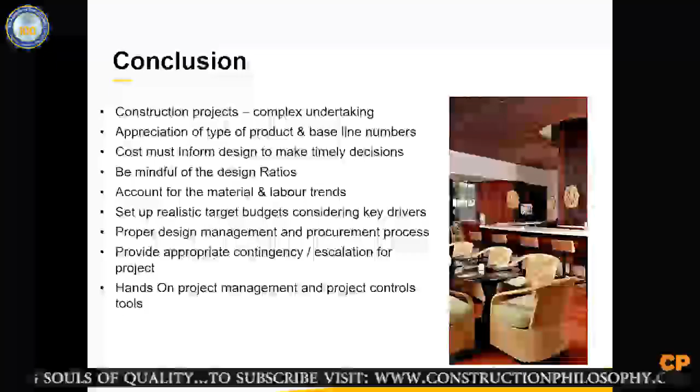So concluding the session, construction projects are complex. There are multiple variables, there are multiple players. It is not an easy task, and there are factors which are out of your hand.

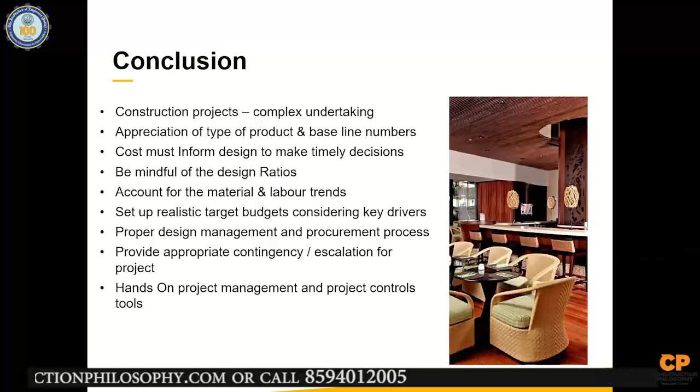So there's not to be taken lightly. You need to appreciate the type of product you're dealing in, and you need to understand what your baselines are. The cost must inform the design so they can make the right decisions. Be clear about the design ratio, the parking ratios, the FOH to BOH, to the common areas, corridors, to the apartments, or balcony to other balcony areas to the buildings. Understand all that before you go ahead, right?

You need to ensure that you have the material and labor trends clear. Set up your realistic budgets to ensure that you don't have shortfalls and you don't underquote when you price it out. Do clear design management and procurement process. Anticipate the contingency that is required, and have a proper control in place to deliver the project. Right.

That's it from me from the presentation side, and happy to take the questions here now.

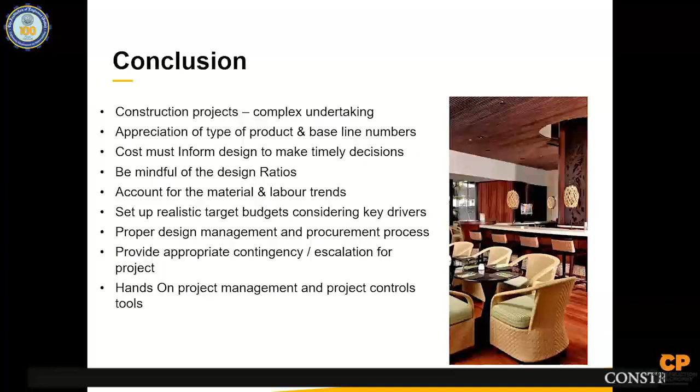Yeah, in the Indian scenario, the contractors play some tricks to become L1. For example, if they are not quoting the rate for one particular item in the BOQ, when you calculate, they will become L1. How do you counteract this kind of trick to normalize them? What kind of normalization techniques do you use in the BOQ?

So when we look at one, obviously we do our internal pricing, so we know what the real price should be. Second, when we do the average, lowest and medium, we identify the items which are creating a large havoc compared to what the market is talking about. When you compare that along with your 80-20 ratio, you know the items which are abnormal and which something you need to look at.

You focus on that when you negotiate with the contractor. You question them. When you're negotiating, you have all the right to question the price because you are the QS on the job. Based on that, I believe you should be able to adequately cover yourself and the client.

Okay, basically you mean to say you can replace this with a realistic in-house quantity cost estimation in that location and then prepare the comparative statement? Yeah, you would definitely do that. Internal pricing is required, whether you're working with a client or a consultant. You need to have internal pricing because you cannot depend on the contractor's price.

Okay, thank you. Yeah, Himanshu, go ahead.

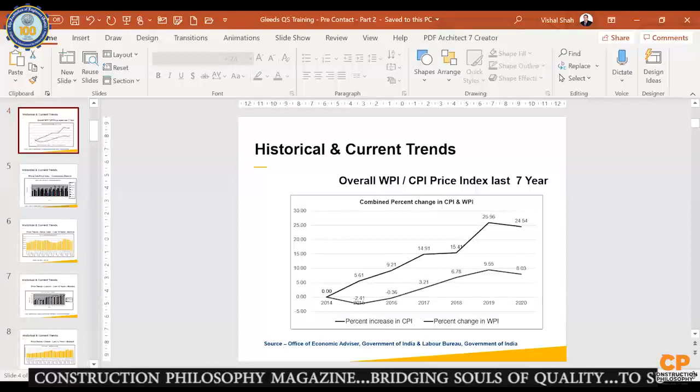Okay, so I'm sharing the screen so that we are all on the same page. So to answer your question, this is what the trend is talking about. My problem here is, this is a general CPI and WPI. This does not give me the right picture, because it has everything attached to it. Even with all the weightages in the economy, you have some weightage for steel, and this is not construction-specific. So you will have items which are not related to you, like food grains and so on.

This is all added up over here. So if you're really looking for a pure construction inflation index, then this is not the right approach. It can give you an indication, but it's not the final one.

So what I would prefer doing, and what we have done as Gleeds, is we have taken a small project, say a commercial building, and we are pricing that building every 6 months, repricing it as per the rate we have today.

So that gives me, if I'm a client or a contractor, say in the beginning of a 5-year or 2-year project, I have to give the escalation percentage to the client for getting the contract. And I have to sub-package the contract later, like MEP, finishes. The specially sub-packaged contractors will then be bidding me, and they can claim the escalation on me, right?

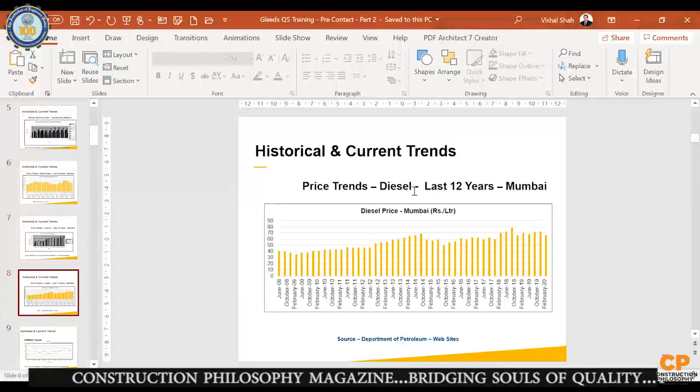And you mentioned a solution on that which I couldn't get - package-wise or milestone-wise submission to the headquarters, so we hold the money. We hold that money. How do you define that in the contract? How do you define that in the contract conditions? You can put it as sub-milestones for the packages.

Okay, I'd appreciate it if you could share that with the participants. If you can share the conditions of contract - no private clients, you cannot, but I know you have a lot of information, so it will help. Because when we award the packages, almost all the contract conditions are covered. For example, if I write a letter to the client or the package guys later regarding non-submission, or regarding spare parts during maintenance, each of these is covered in the package contract conditions. So it will help us in claiming or negotiating at a later stage, post-contract, because everything is defined in the package contract condition.

So something that can help us - if you have anything in mind to share. You want standard conditions of contract? Yes, if you have something for private use, since you're working on so many private contracts now. So if you can share anything, that would help - otherwise no issues, something confidential. Okay fine, I'll give it to Nebu.

Okay, thank you. But Chibu Thomas, can I ask you one question? Yes, please. Thomas, in CPWD everything is given in detail. For private it is different - of course private is different, but private people can build on this. Slightly modifying the CPWD norms is a very good option for a private agency.